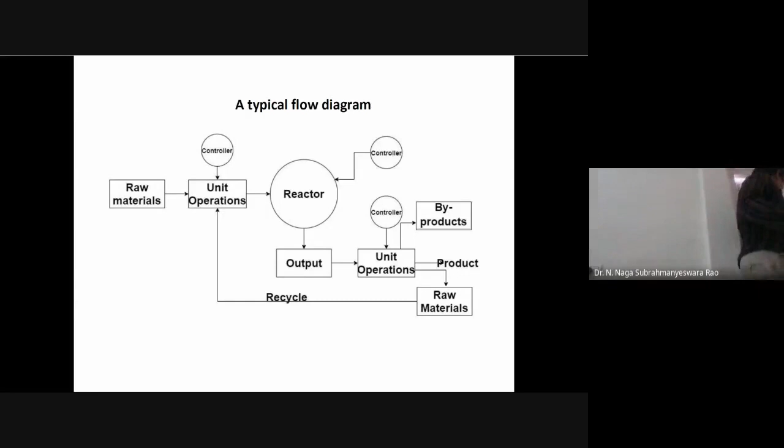Yes. Yeah, sorry for the interruption. Am I audible? Yes, sir. Yeah.

So here we have to develop a process, an equipment, and we have to optimize and control a process. Suppose if you develop a process, how can you say that process is correct with respect to the variables? So we have to optimize the variables. Variables means maybe temperature, maybe composition, maybe pressure, or something like that. With respect to those, at these conditions the process is optimized. The process will give an efficient, economical, and eco-friendly result.

And also we have to control. Why do we have to control? Suppose you say that these conditions are optimized, but how can you maintain those parameters? Because the moment you start a process, the parameters will change. So you have to keep the variables at a set point, that is called control.

And also operation and management of a process plant. You all know why we are learning all these things. Finally, we have to go to a plant and we have to operate, and we have to manage the process in that particular plant.

And environmental monitoring, we have to monitor the environment. That means whether our process is giving toxic gases, whatever the emissions, we have to monitor.

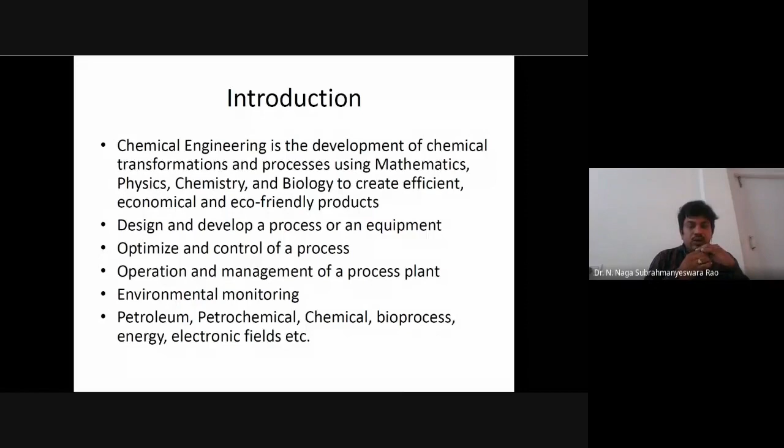And what are the fields we have? Petroleum, petrochemical, chemical, bioprocess, energy, and all these things. I'm telling you these, not only these. Suppose pharmaceutical, we have bioprocess, we have chemical, we have electronic. You all know that we are using a memory card. Even the electronic chip also involves the operational chemical engineer. That means the chemical engineer is involved in all these things.

So this is a typical flow diagram which I want to show you. If you understand this flow sheet, you will understand the idea of a chemical engineer. Suppose raw materials, what are the raw materials? Those are the inputs you are giving. And can you get the products immediately? So the raw materials can be in pure form or in the impure form. From where can you get the raw materials?

Suppose if you want to prepare a metallic oxide, we have to get the metals from there. Those are not pure, so how can you purify it? We have to use the unit operations. I will discuss what are those unit operations.

And once the raw materials undergo the unit operations, those raw materials will be sent to the reactor. What is happening in the reactor? Reaction takes place. And what will the reactor give? It will give the product output. Why am I telling output? Because you are not getting only a product.

You will get along with a main product, you will get some byproducts, and also you will have some raw materials. Why are raw materials also coming? Because there is no 100% conversion. Definitely some raw materials which are not converted will come out.

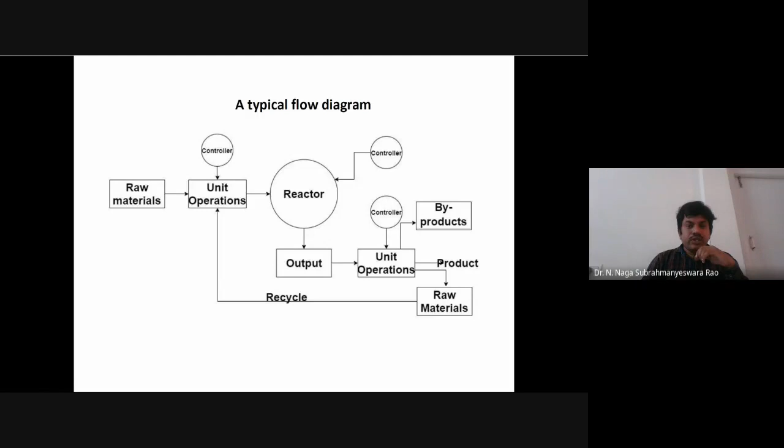And what are the subjects we have? We have unit operations, mechanical unit operations, fluid mechanics, heat transfer, and mass transfer operations, transport phenomena - of course it is nothing but the combination of these three. Unit process, chemical reaction engineering, chemical process calculations, or you can call material and energy balance, thermodynamics, process equipment design, instrumentation and process control, chemical technology, chemical engineering mathematics, chemical process economics, process optimization and simulation. These are the various subjects.

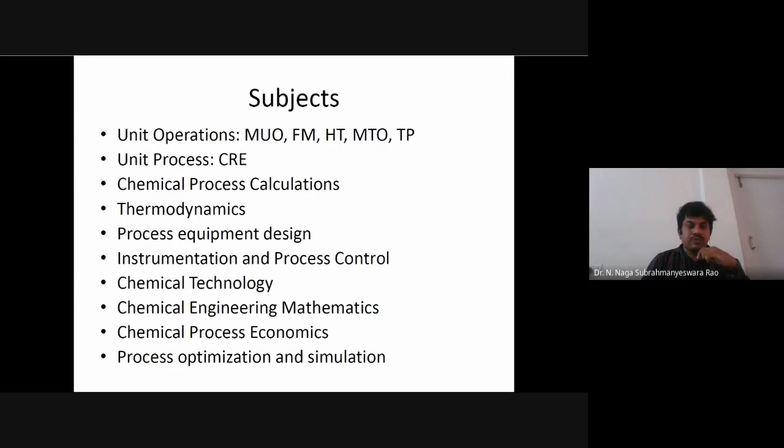Coming to mechanical unit operations, why do we have to study this? As the name suggests, you might think mechanical unit operations comes under the mechanical engineering branch. Why are we studying it? No, it's not like that. Mechanical means we are studying unit operations that are nothing but separations using mechanical forces. So we call them mechanical unit operations, purely mechanical in nature. What is the criteria? We separate solids based on size, shape, and density. Suppose you are given a solid of different sizes.

So how can you separate them? You can do screening. What does the screen do? The smaller size particles go through the screen, and the coarser particles are retained. That means you are separating the particles using a screen. Similarly, shape also - even particles of a particular shape can be separated, and also density. If the density of a substance is very high, it will go down. If a substance has lighter density, it will float.

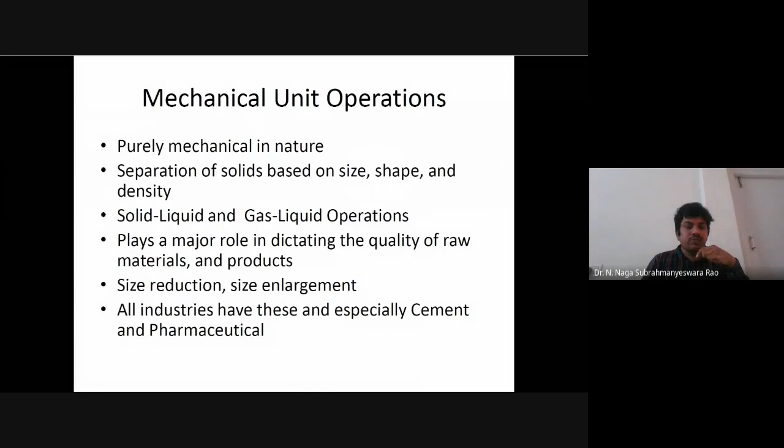Coming to the next one, fluid mechanics - the study of behavior of fluids under rest and motion. So fluid mechanics deals with the behavior of fluids which are at rest and in motion. That means fluid mechanics tells you - you can understand whether any fluid is at rest or in motion.

It also deals with compressible and incompressible fluids. What is a compressible fluid and what is an incompressible fluid? Suppose you apply some force - a compressible fluid will respond immediately, meaning there will be a change, its density varies. Incompressible fluids will withstand the compressive force. That means liquids are generally incompressible and gases are compressible. It doesn't mean all liquids are incompressible - if you compress a liquid enough, you can call it compressible too. Both liquids and gases are combined and called fluids.

Why do we have to study fluid mechanics? It is very important to study the flow of fluids in pipes. Why do we need to understand flow of fluids in pipes? If you don't understand it, it can damage your pipes, it can corrode your pipes - that's why we have to understand the behavior of fluids. And not only pipes, we also have pumps, compressors, reactors. In reactions too, we have to understand whether the fluid flow is plug flow or whatever type, we have to understand that.

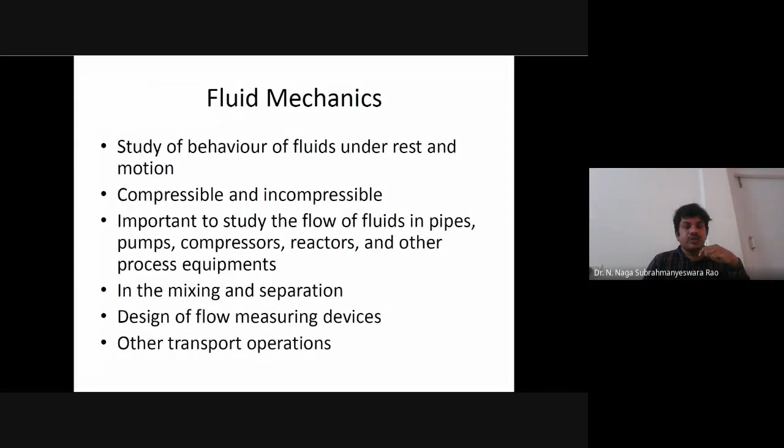I will give an example. Suppose we use a room spray. I have sprayed in a room where there is no fan, and in another room I have applied the spray where a fan is there. Will there be a difference between the two rooms? Obviously, in the room where the fan is there, you will get the smell immediately because the fluid, the air, is moving. So because of the movement, the mass transfer also will be changed. That's why we have to understand fluid mechanics to understand the other transport operations.

Coming to heat transfer - we have to understand the heat transfer modes: conduction, convection, and radiation. As you know, conduction is mostly predominant in solids, but it also exists in liquids. Conduction means heat transfer by the vibrations of the molecules. Molecules won't move from their places, they will vibrate in their places only, but they will transport the heat from one molecule to another.

In the case of convection, there is fluid movement and heat transfer occurs. And in the case of radiation, if a substance is at very high temperature, it can radiate heat. So you have to understand the heat exchange between different bodies. Suppose you're conducting a reaction in a reactor and suddenly some heat is released - where will it go? It will go to the surroundings. So you have to understand how much heat is going out, and to understand that, you should know heat transfer.

And in the case of reactions involving absorption or emission - just now I told you there may be emission of energy or absorption of energy also. All fluids and solids are heated or cooled. Suppose you want to preheat the feed, or if you want to cool a particular hot substance, like in cooling towers - there you have to understand heat transfer along with mass transfer. So whenever there is heating, whenever there is cooling, you have to understand this.

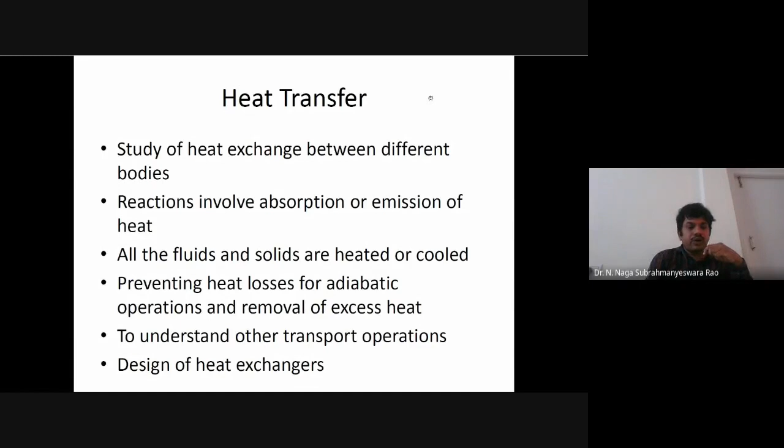Next is preventing heat losses for adiabatic operations. What is the meaning of adiabatic operation? In adiabatic operation, you don't allow any escape of heat - that means you will keep the heat within the substance, so there is no exchange between system and surroundings. In such a case, you have to prevent the heat losses. This is also linked to other transport operations - as I told you about fluid mechanics, heat transfer is also linked to mass transfer and fluid mechanics. So to understand heat changes and all those, you have to understand heat transfer.

Coming to mass transfer operations - these operations dominate in a chemical process. Actually, these mass transfer operations are also unit operations. But what is the difference between mechanical operations and mass transfer operations? In mechanical operations, you cannot separate any homogeneous phase, but in mass transfer operations you can separate like that. That means mass transfer operations are diffusion based operations.

Those are not like mechanical operations - if you apply some force, there is separation, but that cannot take place in mass transfer operation. It is purely diffusion based. So here, how will you separate? Separation of components of a homogeneous phase is also possible here, but in the case of mechanical operations, you can separate oil and water. How can you separate oil and water? Take a separating funnel for the mixture, and automatically it will be separated into two layers. You cannot call it mass transfer - you have to call it mechanical.

What are the different mass transfer operations? We have distillation, absorption, extraction, drying, etc. And why do we have to understand all these things? Because you have to design the equipment.

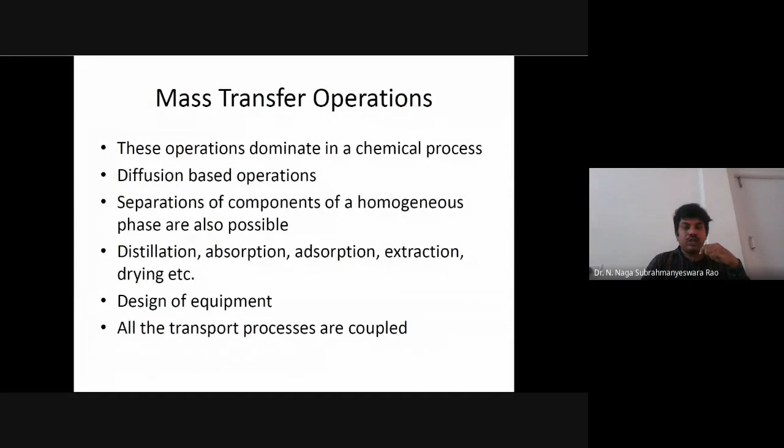All transport processes are coupled, as I mentioned in the previous slides. Along with fluid mechanics and heat transfer, you have to understand mass transfer because all three are coupled. I don't discuss transport phenomena separately because it needs the help of all three. Whenever mass transfer, heat transfer, and fluid mechanics all take place together, then you have to understand transport phenomena.

Coming to chemical reaction engineering, it is a unit process. Unit process means it is a chemical process, not physical. What is the difference between physical and chemical? Physical change means there is no change in material composition, but in chemical change, there is a change in material. So here it is conversion of raw materials into products.

What are the different types of reactors we have? Batch type, semi-batch, and continuous. All of you know that continuous reactors are mostly employed in plants. And you will get a doubt: if continuous reactors are employed in the plant, why do we have to understand batch and semi-batch?

The first thing you have to understand is, if you want to design or understand a continuous process, it should start as batch. You have to understand batch process. Suppose you are in the final year, some of you. Once you go out, then only the next batch will come, then only it becomes continuous. Otherwise, it is a batch process.

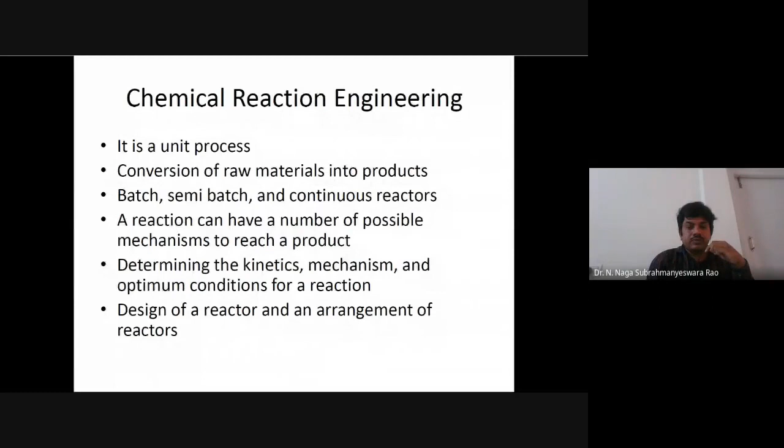Next to the chemical process calculations. This is for second year, I think third semester people will have this. Chemical process calculations means material and energy balance.

So chemical process means, in general, a chemical process has both physical and chemical change. And what are these changes? They accompany a mass change. There may be change in mass, momentum, or energy. And based on the change, we have to develop equations for momentum, mass, and energy.

Especially chemical process calculations deal with material and energy balance. What is the meaning of material and energy balance? If a chemical reaction takes place, how much material is consumed, how much is produced, how much energy is released, how much energy is utilized in the particular reaction.

So you will understand that whatever calculations are there, you have to do with that particular chemical process. Chemical process means here you have to understand that in chemical process calculations, you will do the calculations for drying, for crystallization, and for all other processes. So here you will study both the material as well as the energy of the particular process.

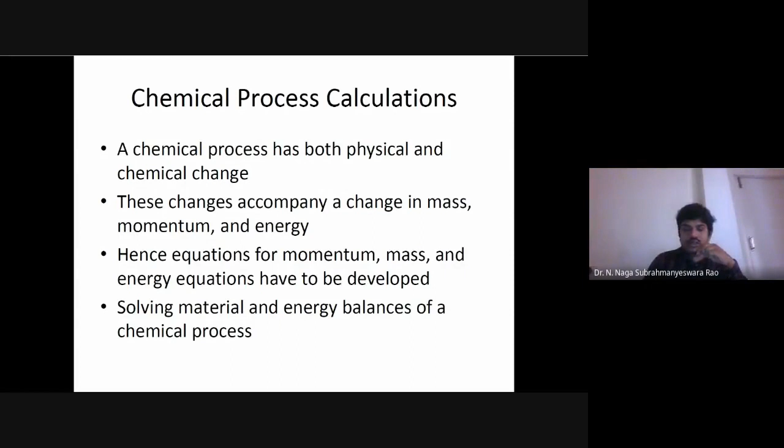Next is thermodynamics. And all of you should understand this. Thermodynamics is an important subject. Very important, because most people really don't know why it is important.

Why it is important: because it is the nature's consent and reality. What is the meaning of that? Thermodynamics is the reality actually. What is reality means? Let me tell you.

Suppose you are riding on a bike. What is the maximum speed you can go? How can you know that? If you observe your bike's speedometer, maybe the maximum speed is 150. Since you know it is 150, you can go 120, 100, 80, or like that. If you don't know that, you don't know how to go to the maximum speed.

That means if you know the maximum limit, then only will you proceed. Or if you know the minimum limit, then only will you proceed. And who will give the maximum and minimum limits? Thermodynamics will give you that. Okay, I will give an example.

Suppose I am doing a distillation. I want to separate alcohol and water. I do distillation, and I will separate up to some point. At one point, there is no further separation. Why is there no further separation? Because there may be azeotropic formation or equilibrium reached. Once equilibrium is reached, whatever you do, you cannot separate further.

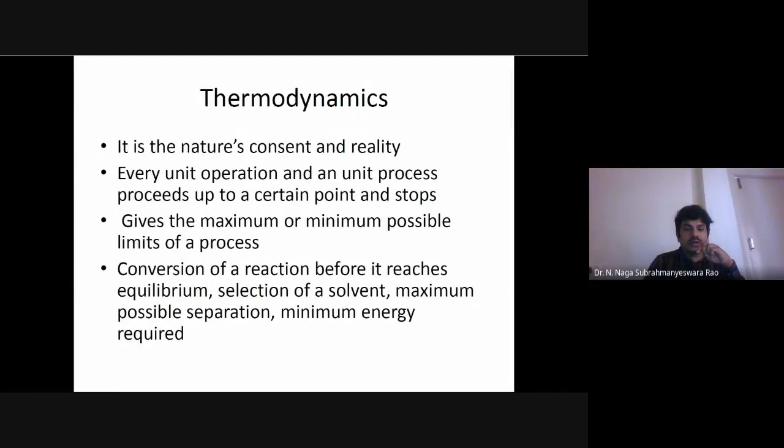Yes, you can select different solvents and try with them, and thermodynamics will tell you that this solvent is good, or this solvent is like this. So it will tell you about the reality of a particular solvent, and based on that you can select, to achieve maximum possible separation with minimum energy.

Next is the design. All the unit operations need equipment to be conducted, so we have to design a reactor, separator, mixer, and so on. This is the design subject you will get in the final year.

How can you design any equipment? You have to calculate or estimate the particular dimensions using correlations. How can you calculate? Already correlations and equations are there. Using those relations or equations, or sometimes no correlation is there. How can you design? You have to depend on experiments also.

You perform different experiments, and from experimental information you have to understand. All this information will give an idea about design. The last point is use of computer to facilitate the design more efficiently. If you don't have a particular experimentation completely, experimental data completely, then you have to depend on the computer. That means you have to depend on modeling, you have to depend on simulation, then you can generate some data.

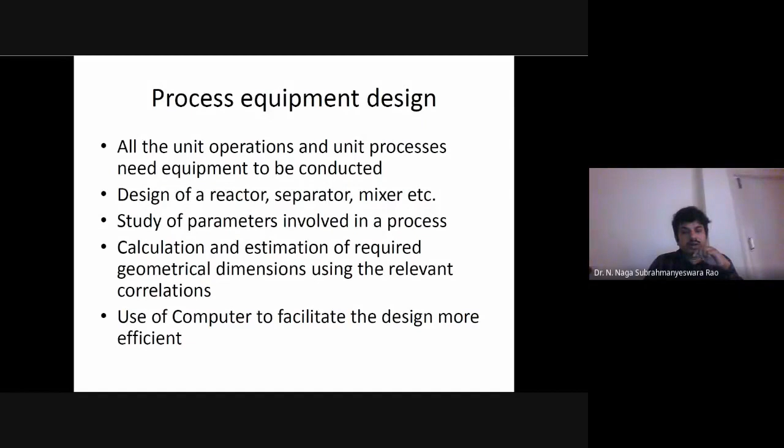Next is instrumentation and process control. As I told you, whenever you are doing an experiment, you have to optimize a process. Optimization means you have to control the parameters, you have to maintain the process at the given parameters. But how can you maintain that? Using process control. But before going to process control, you also should know about the instruments.

What are the instruments we have? Thermometer or thermocouple for measuring the temperature, pressure gauge, manometer for measuring pressure. All these instruments will give you experimental readings. So what is the use of these readings? Once you understand these readings, then you can compare these measuring values with the set point value.

Then what will you do next? You compare with the set point, then you find the error. What does the process control do? A controller will take an action based on the error. What is error here? Error is the set point minus the measured value. How can you get the measured value? You get it by using the instruments. So once these things are there, you can control with different controllers and different controlling actions.

That's why we have to study this subject, instrumentation and process control.

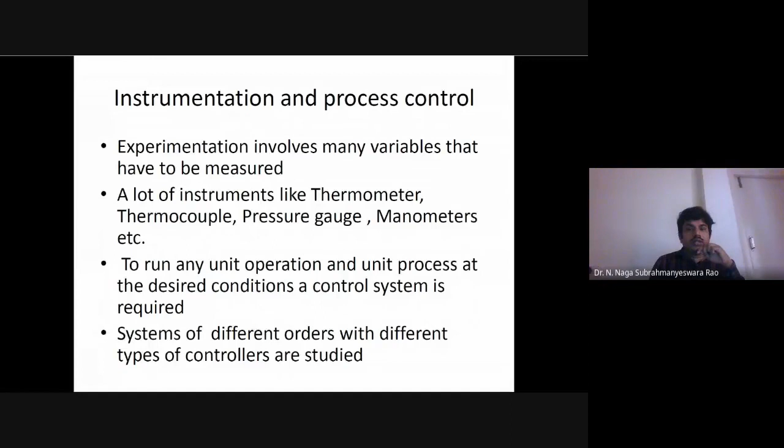Next, chemical technology. This is completely about flow sheets and all. As you know, whenever you go to any place, you are given a map. By seeing the map you understand how to go, where to go. In a similar way, chemical technology gives the complete flow sheet from raw material to the product. By seeing the flow sheet, you understand what happens in a cement plant, what happens in a pharmaceutical plant, what happens in a steel making process.

To understand a process, chemical technology gives all the unit operations as well as unit processes, along with the conditions maintained, in one flow sheet. All this can be seen from the flow sheet, which gives an overall view of major products along with byproducts.

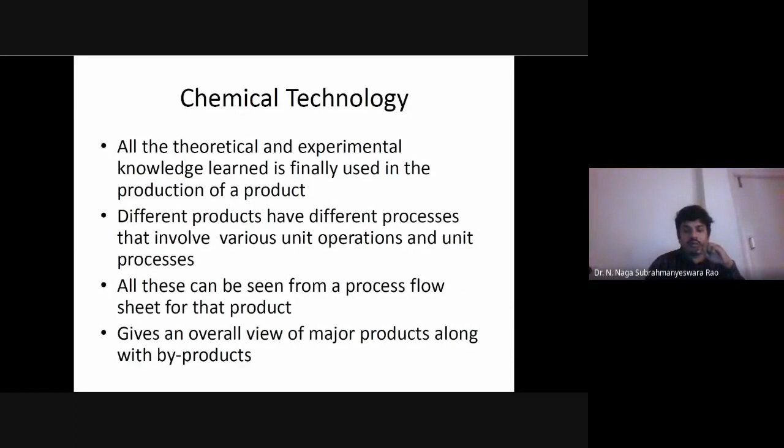Economics - as I told you in the first slide, you have to produce an efficient product, but what is the second condition? Economic also. So economics is very important. Any process will be designed considering the primary factor, money. Even though you consider other factors, the first thing that comes into the picture is money.

If you have a plan and you are a very good engineer, you suggest that this is very good, if you implement it you will get the best result. But they will ask you what is the cost of that. Then they will proceed based on the cost. So the first thing is economics.

How to economize? You have to economize the overall process, not a part of it. Suppose in distillation, can I increase the number of trays? If I increase the number of trays, I will get one benefit, better separation, but the load on the condenser and reboiler will change. If I reduce the number of plates, I get the other option. So what do I have to do? I have to optimize the entire process, the total process - the total cost, not just the cost of the trays or the operating cost.

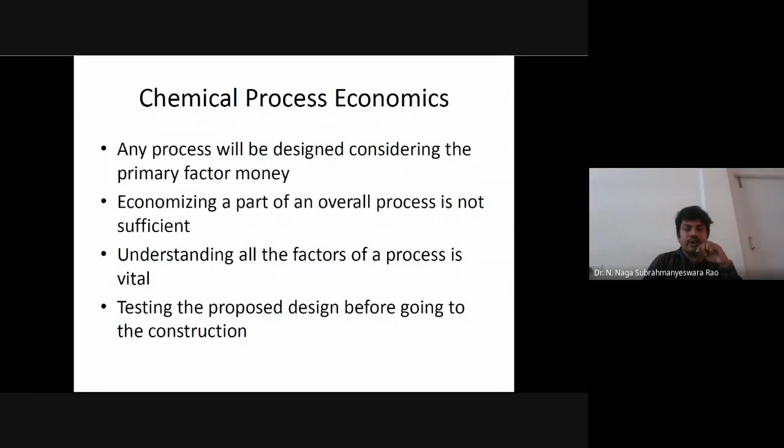Nowadays many softwares are there. Design softwares give an idea of how viable and feasible this is, and also help with optimization, modeling, and simulation.

Optimization is always important. What is optimization? It is local as well as global search. Suppose I want to control temperature, pressure, or composition—I have to minimize the temperature, maximize the pressure. I have to search for the optimum conditions. So optimization will tell you about the particular process optimization with respect to those parameters.

What is the advantage of experiments? They always give realistic information. But the problem is you cannot conduct experiments at infinite number of points, and also sometimes hazardous situations are there—you cannot conduct the experiments. So then who will take care of that job?

The modeling equations. How do you develop modeling equations? By understanding the theory, or you develop a model equation based on experimental data. That means both theory and experimental data will provide you modeling equations. Then simulating them provides the information. So what is modeling? Developing governing equations is modeling. What is simulation? Solving those equations—whatever you solve using MATLAB, that is called simulation.

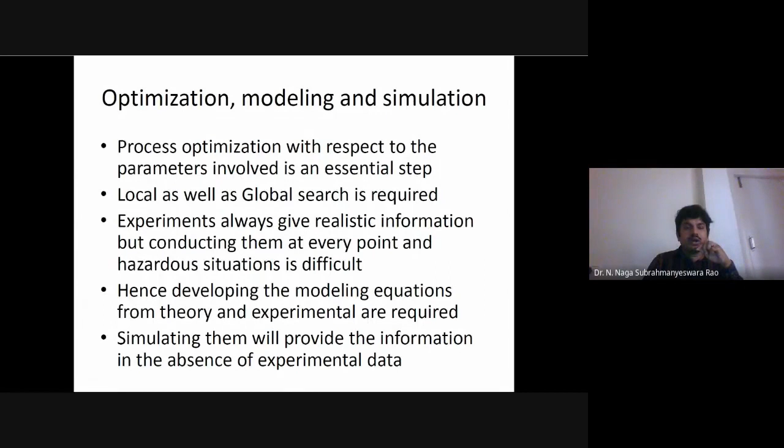But before simulation, what comes first? Modeling. If you don't have any equation, how can you solve it? So modeling is okay. Now what is our opinion—are experiments bad? It's not like that. Experiments always give realistic information. Without experiments, you cannot model either. What is the use of modeling equations? Once a model is developed, it will provide values at any point where you cannot conduct an experiment. So modeling equations are complementary to experiments, not that modeling is good and experiments are bad.

Mathematics is the language to express science. Suppose you are talking in Gujarati to communicate with others—I am talking in my language. Mathematics is the language to express science, because you cannot express science in words after some time. You should go with the mathematical equation.

Why do we have to understand mathematics? What is the use of mathematics? Chemistry is okay, but why mathematics? Because all the equations—mass equation, momentum equation, energy equation—are mathematical equations only. Those are ordinary differential equations, partial differential equations. That means mathematics is coming into the picture, you cannot avoid it. Also, the ideal gas equation, PV equals nRT, is a mathematical equation. Any correlation is a mathematical equation. So mathematics is inherent in chemical engineering, you cannot avoid it.

What subjects do you have to understand? Algebra, linear algebra, vector algebra, calculus, differential equations, integration, geometry also—because you need it to understand flows and all. Also if you want to be good at coding, if you're interested in writing a program, you definitely need the help of mathematics. You should have knowledge of mathematics.

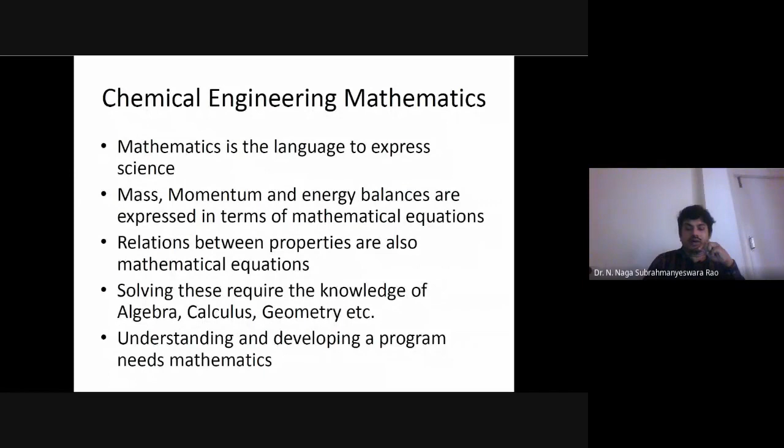And finally the electives. I just had a discussion with your faculty, and he told me we are introducing electives, including pharma. Apart from the core subjects, you should always have electives. How do you select them? It's not that if your friend selected an elective, you also should take it. You have to decide which subject you are interested in.

Suppose you are more interested in physics-oriented material science, nanoscience, or if you're interested in fuel, petroleum, fertilizer, or the biological side—maybe you can go for bioprocess engineering. If you want to understand membranes, take membrane technology. If you want to understand separations, multi-component distillation, or energies—renewable energies like solar, wind, tidal energy—all those are options.

If you are interested in chemistry, you can look into catalysis, or if you are interested in corrosion, you can have that too. I did not include all the electives, so many electives are there. Electives are completely based on your choice.

I did not include pharma here, as sir has told that pharma is also a very good elective.

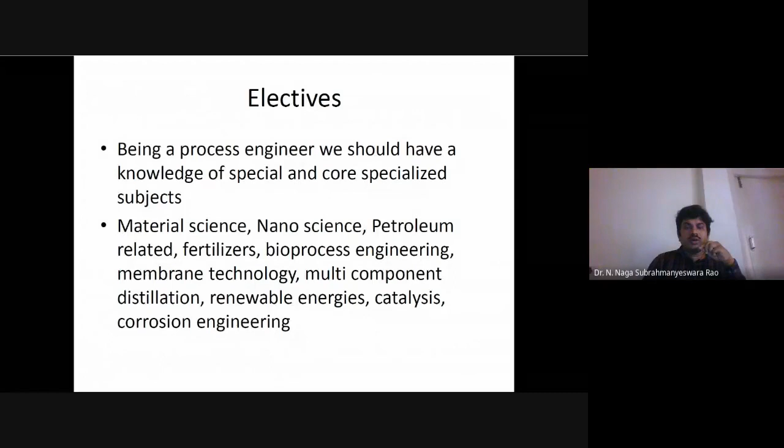I want to conclude whatever I have discussed. Chemical engineering is an interdisciplinary field, framed to design a new process or optimize an existing process. If there is no process, you have to design it - that is your job. If a process is existing, you have to optimize it. So two things are there. Which process? Is it chemical process only? No, any process - that's why chemical engineer is also called process engineer.

Suppose a chip is there, an electronic chip. Even in the manufacture of the chip, chemical engineer will be there. Any process engineer will be there because he has to understand the process. What are the unique things? You need to handle design of a reactor in any process - a chemical reaction or biological reaction takes place, and who has to design the reactor? That job is only for a chemical engineer.

Next is involvement of engineers in realistic production. In chemical engineering, you will appreciate if you work in a plant, like in petroleum or something like that. When you see the product, you get a feel that you were involved in getting that product - that means in realistic production, you have a chance to be involved.